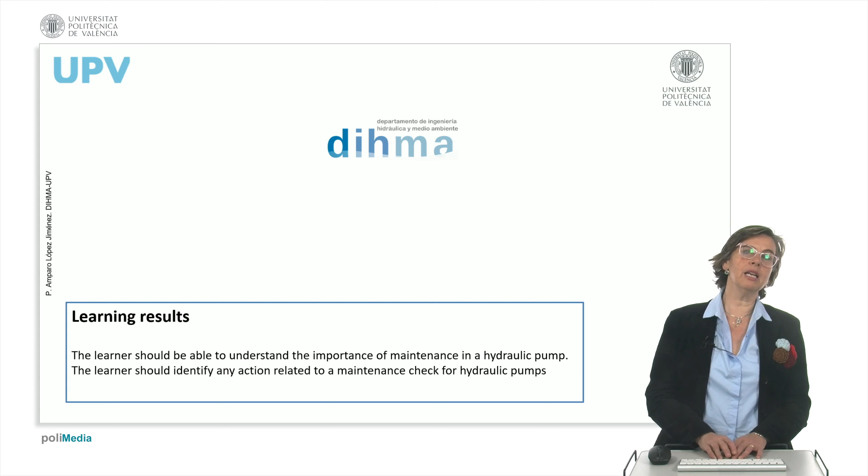When we finish, we will be able to understand the importance of maintenance in hydraulic pump systems, and we will be able to identify any action related to maintenance checks for hydraulic pumps in general. So we are speaking about the need of maintenance in hydraulic pumps, the maintenance actions, and the main conclusions.

Why do we need to maintain hydraulic pumps? Well, hydraulic pumps are fundamental in the operation of any hydraulic water distribution system or any sort of machinery system to convert mechanical power into hydraulic energy. So, in general, the failure of a pump in the system can have very big consequences. So performing maintenance is absolutely important to help the equipment last longer, accomplishing its functions.

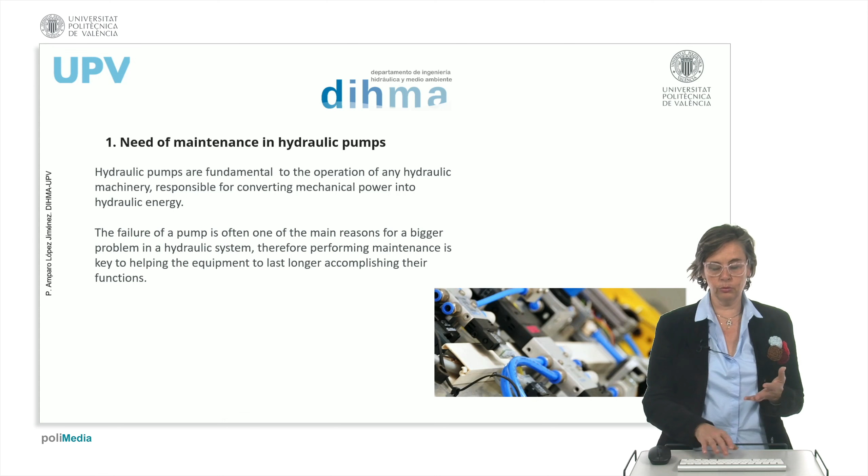So good maintenance helps to prevent unexpected breakdowns, reducing energy consumption and overall operating costs. Neglecting this sort of maintenance can lead to severe damage and very costly repairs, apart from non-sustainable performance of the whole system.

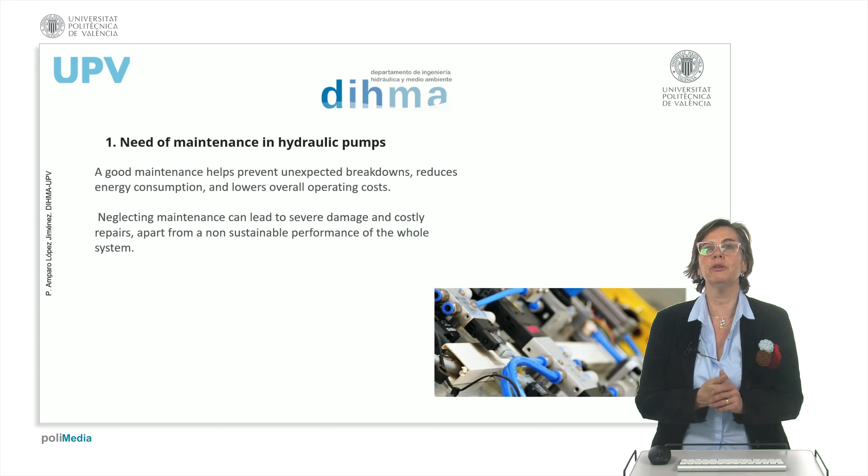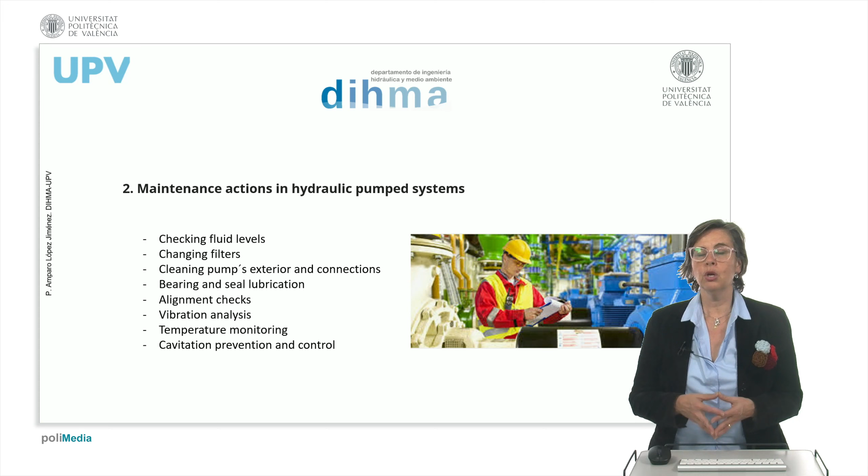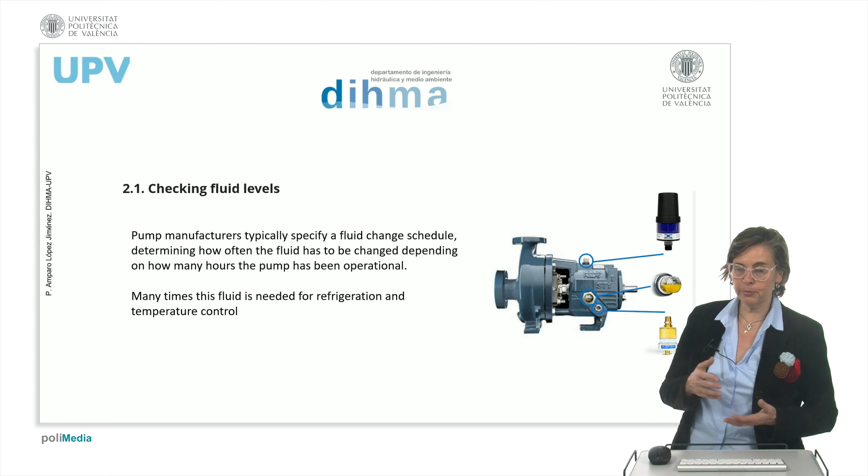Which actions can be considered? Now we are going to enumerate the several actions that should be considered when proposing maintenance in a particular water distribution system with pumping stations. So what should we do? We should check the fluid levels. Normally, manufacturers give us a specific fluid schedule determining how often it has to be changed, because there are many fluids inside the machine for lubrication, for regulation of temperature, or several things. They are often needed for refrigeration or temperature control, and the fluid level must be checked.

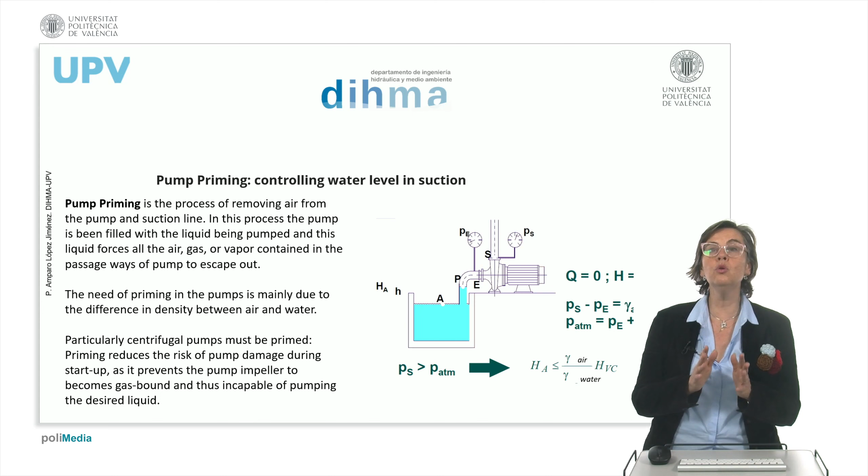We must control the water level in suction, which is priming. It is very important because if we have air in the first part of the pump, we won't have all the head of the system. So controlling the water level in suction is very important so as not to lose the priming of the system.

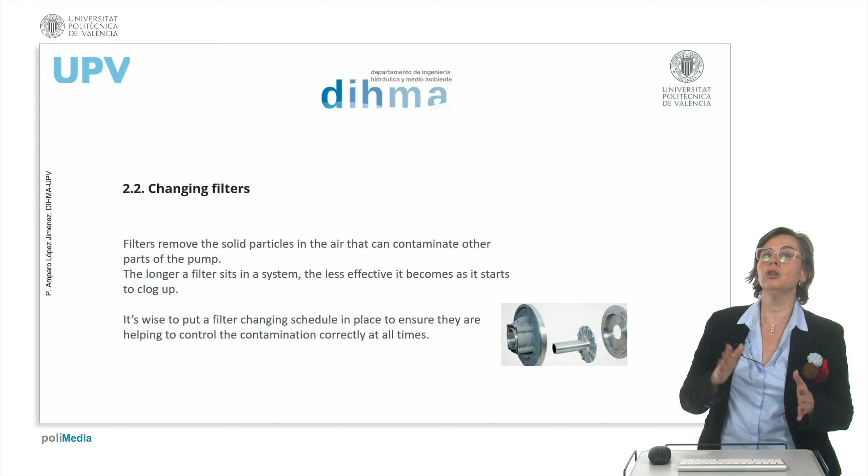We have to change filters. Filters must be removed because they retain solid particles, and the longer the filter is in a system, the less effective it becomes. So it is very important to put a filter schedule in place to ensure that they are not contaminated and they are changed correctly at any time.

We clean very well the pump exterior, the connections, and the parts of the machine, so no contamination can go inside the pumps. It prevents pollution, prevents damage, and it is very, very important when we are using clean water or water distribution system pumps, because they cannot have any sort of contamination or pollution in the water that they provide.

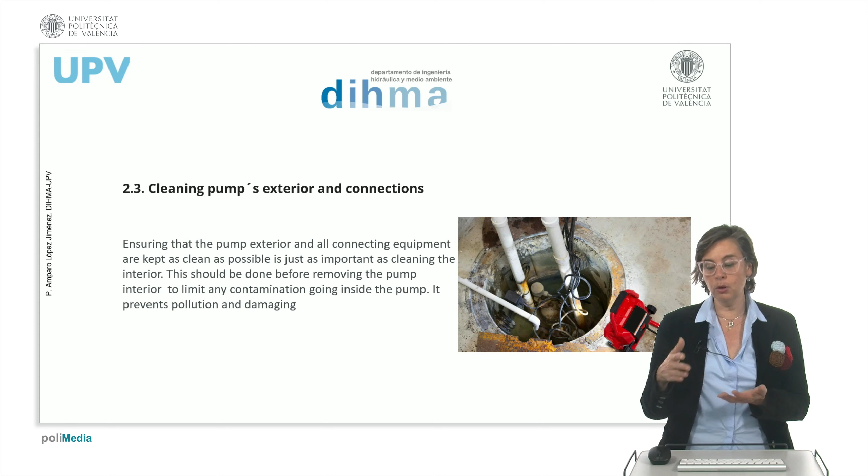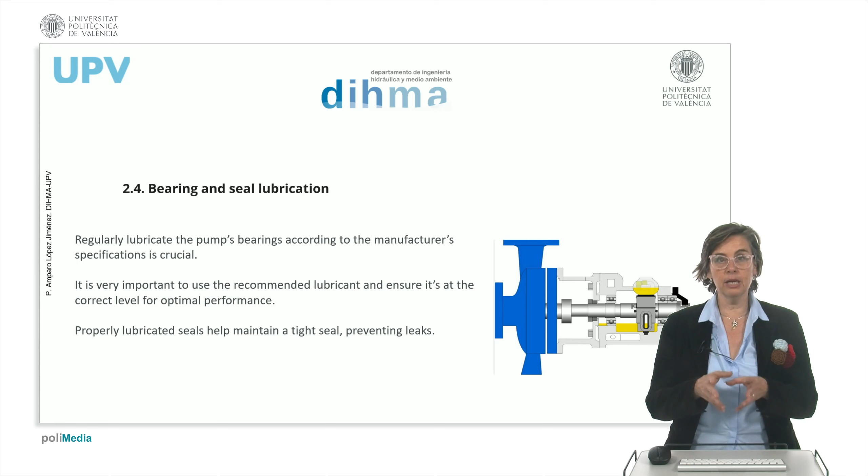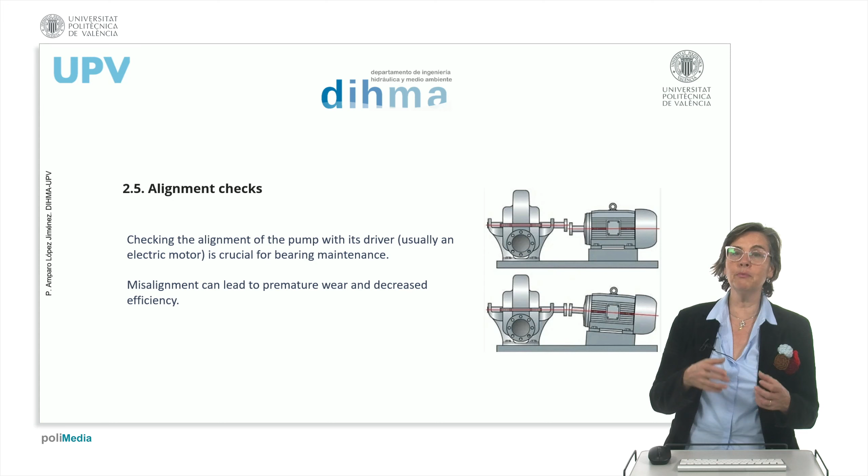With bearing and seal lubrication, it is very important to use the recommended lubricant and ensure it is clean and it maintains the seals. And alignment checks of the axis: checking the alignment is very important for preventing premature wear and decreased efficiency of the system when the motor and the impeller are not well aligned.

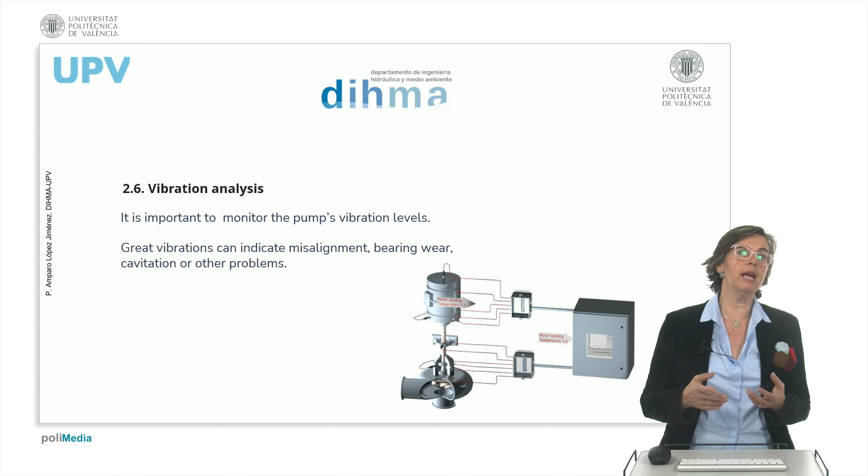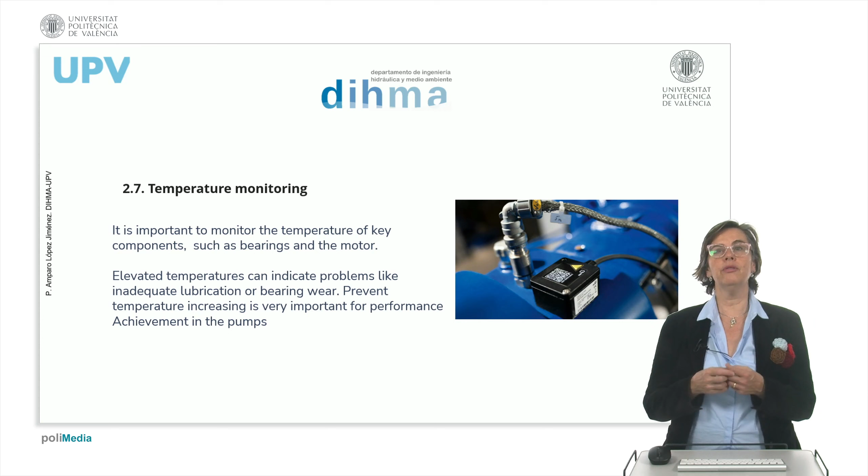We must analyze and monitor vibration to detect misalignment, bearing wear, cavitation, or any other problems. And we have to monitor temperature, because an elevated temperature can indicate several problems like inadequate lubrication, very low performance, very small flows going through the system, or operating very far from the best efficiency point. So temperature monitoring is very important.

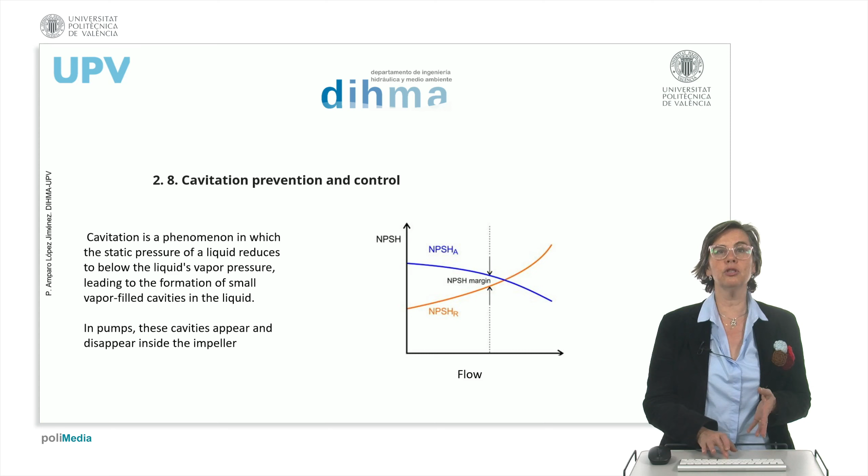And prevent cavitation. We must consider the net positive suction head curves to avoid cavitation, which causes a lot of problems in the functioning of the system, because when a machine is cavitating, the impeller suffers very much and we can have very big damage.

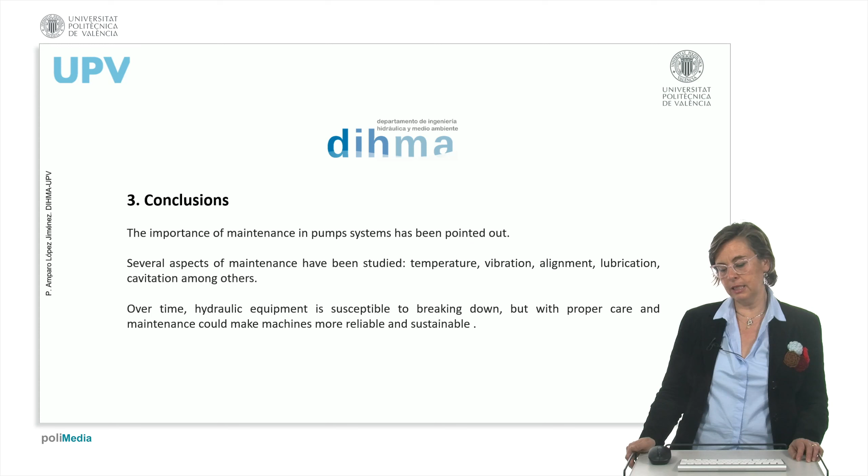So, to conclude, the importance of maintenance is very big, and several aspects have been studied: temperature, vibration, alignment, lubrication, cavitation, and others. Over time, hydraulic equipment is susceptible to breaking down, but with a maintenance system we can make machines more reliable and sustainable, with better performance in our pumped system.